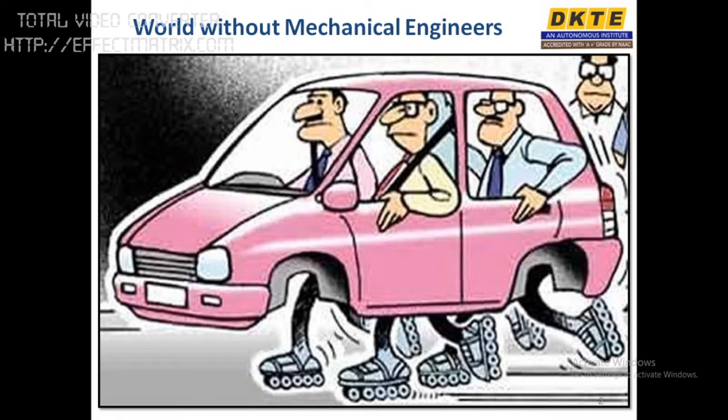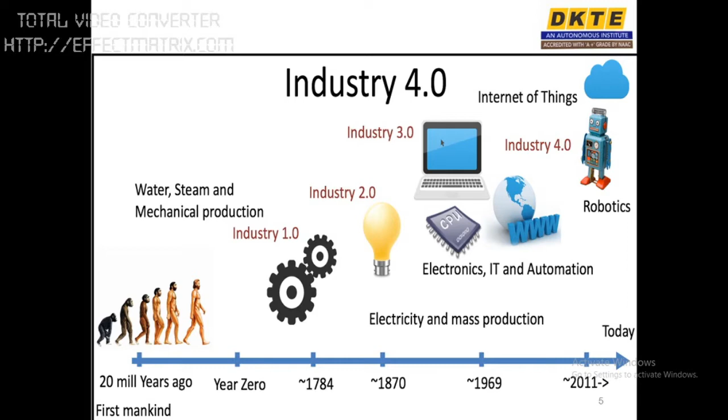Today, we just can't imagine our life without mechanical engineering, as you can see from these images. From basic needs of human beings to comfort products, mechanical engineering is everywhere. It has technologically developed from Industry 1.0 to Industry 4.0 with a more multidisciplinary approach including Internet of Things, robotics, artificial intelligence, and the same can be seen in the evolution of cars too.

The role of a mechanical engineer is to take the product from an idea to the marketplace. The steps in this process, and the areas where a mechanical engineer can find a job, include concept design, material selection as per requirements, design, analysis, production or manufacturing, assembly, and quality control.

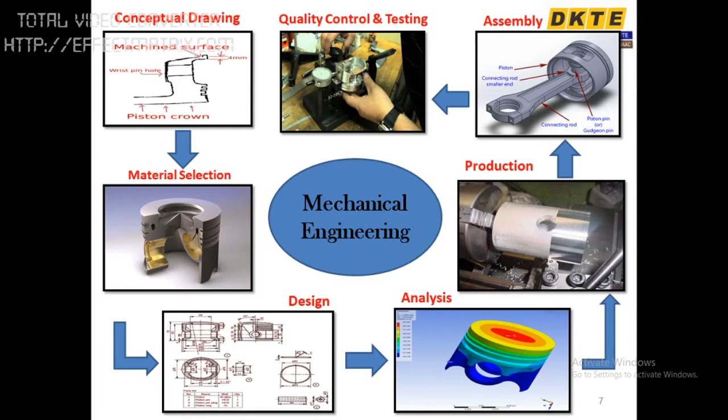Under the Make in India theme, companies and major players like Bosch, Mercedes-Benz, etc. are investing in India, and there are enormous mechanical startups too.

These are the domains of mechanical engineering where you can find yourself a place to make a career. Let us discuss them one by one in detail.

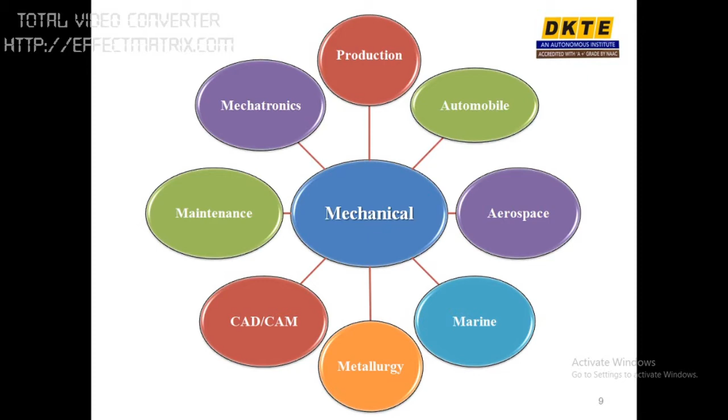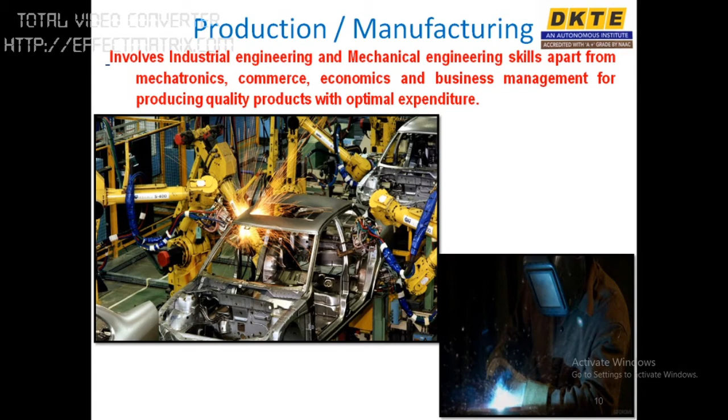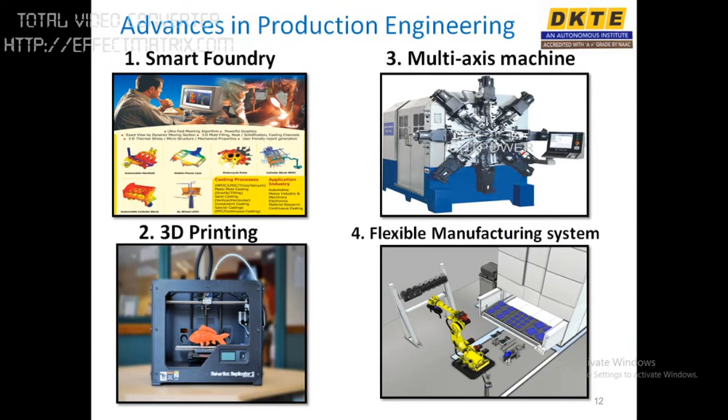Production includes industrial engineering and mechanical engineering skills apart from mechatronics, economics, and business management for producing best quality products at optimum cost. The advances in production engineering include robotics, smart foundry, multi-axis machines, 3D printing, and flexible manufacturing systems.

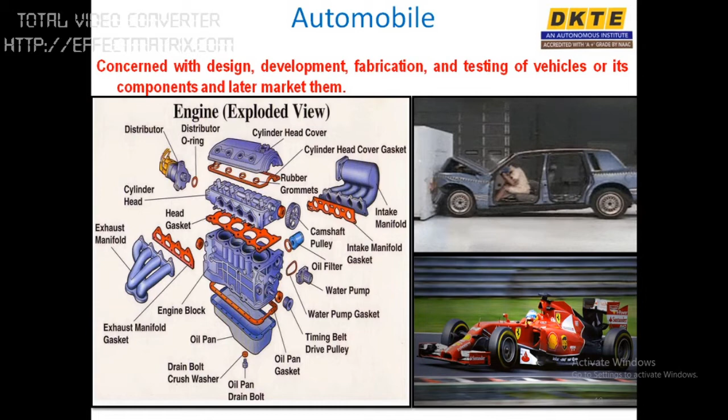Automobile engineering is concerned with design, development, fabrication, and testing of vehicles and later marketing them, and includes advances like hybrid cars, smart or driverless cars, and autotronics.

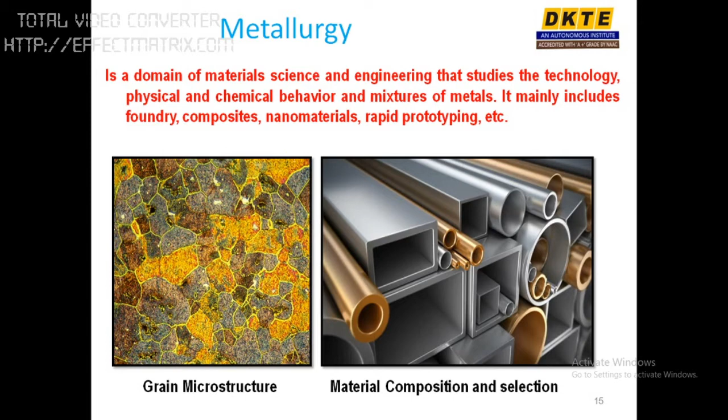Metallurgy is the domain of material science and engineering that deals with technology, physical and chemical behavior, and mixtures of metals. It includes foundry, composites, nanomaterials, rapid prototyping, and biomaterials.

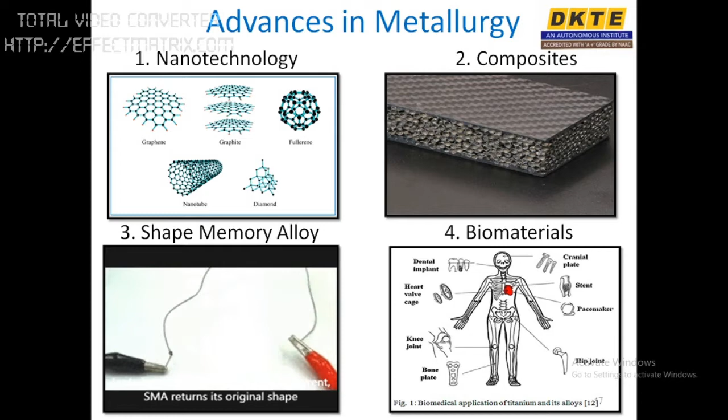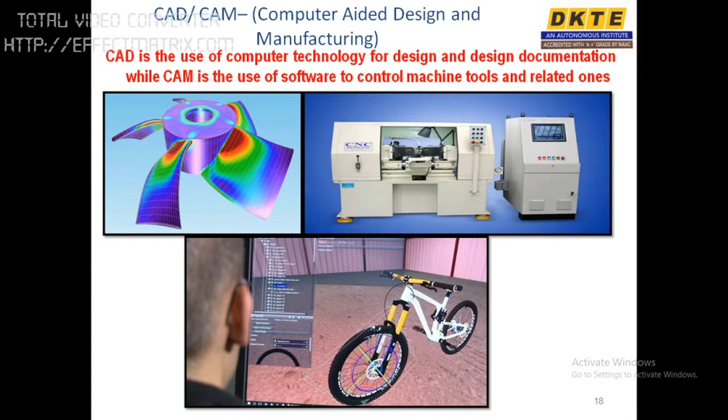CAD is the use of computer technology for design and design documentation, while CAM is the use of software to control machine tools and related processes. The latest advances in CAD/CAM engineering include laser scanning and reverse engineering.

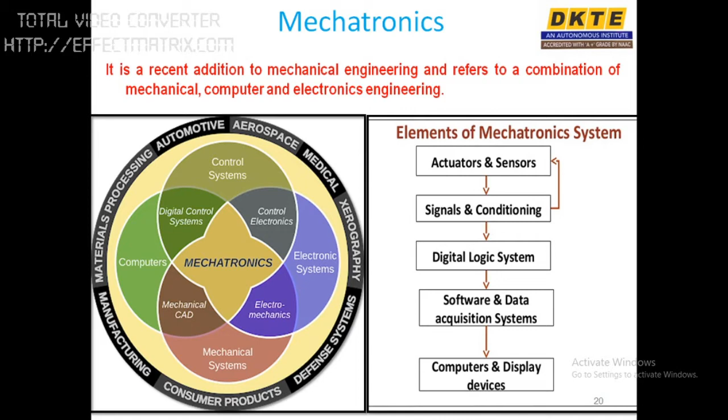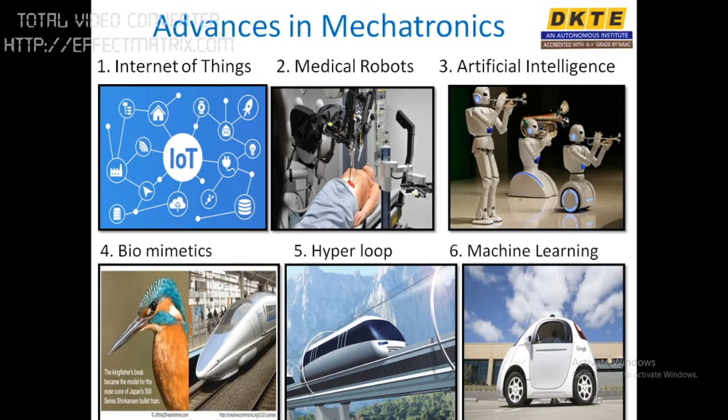Mechatronics is recently added to mechanical engineering and is an integration of mechanical, electronics, electrical, and computer engineering. It can be a great career option for girls opting for the mechanical branch. Advances in mechatronics include Internet of Things, medical robots, artificial intelligence, biomimetics, hyperloop, and machine learning.

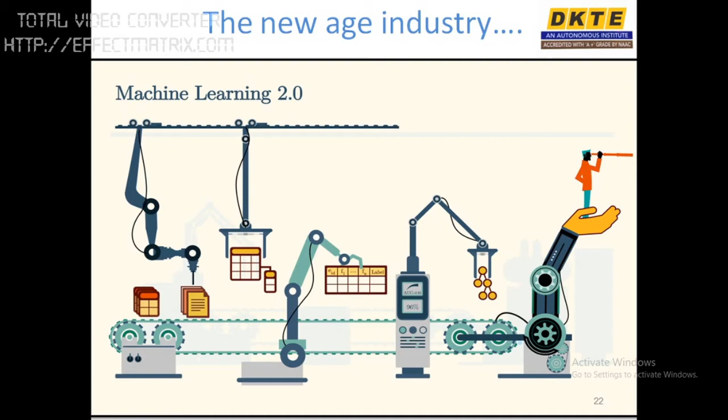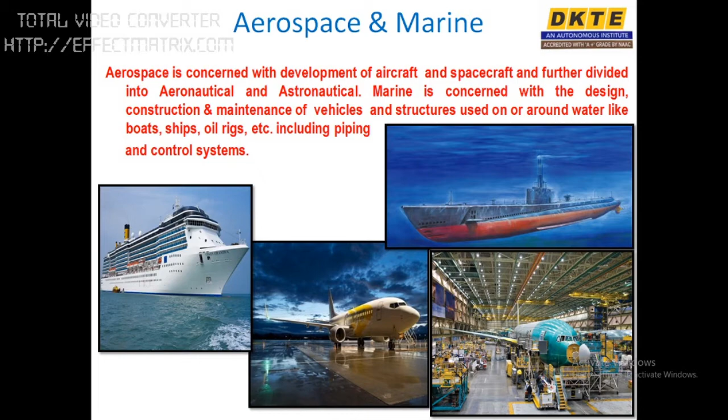Aerospace engineering is concerned with the development of aircraft and spacecraft, while marine engineering includes design, construction, and maintenance of vehicles and structures like boats, ships, oil rigs, etc., including piping and control systems.

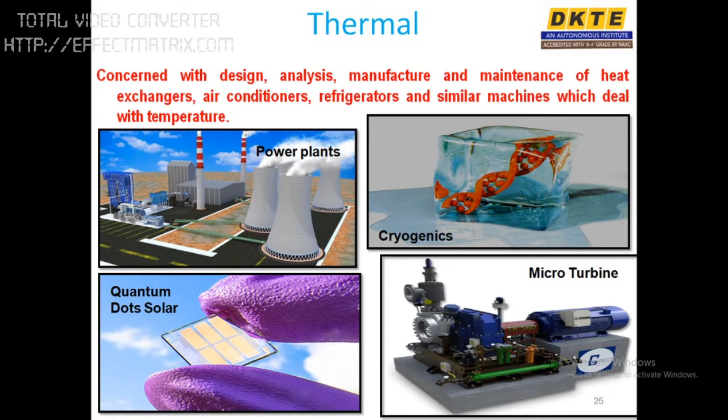Thermal engineering includes design, analysis, manufacture, and maintenance of heat exchangers, air conditioners, refrigerators, and similar machines which deal with temperature.

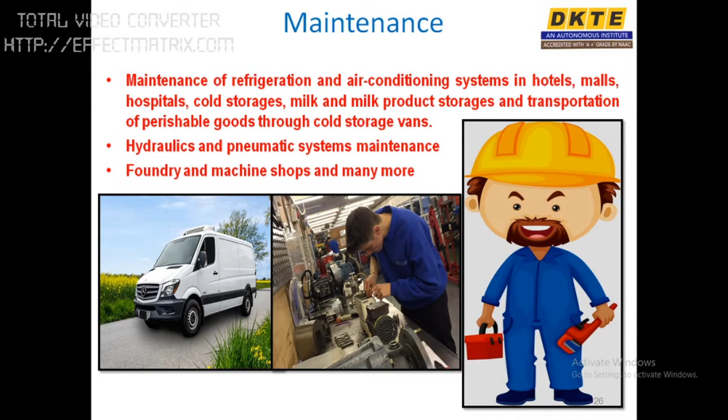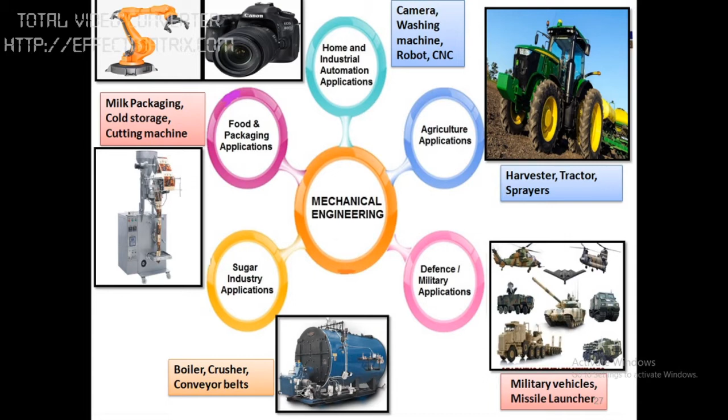Maintenance engineering finds application in refrigeration and air conditioning, hydraulics and pneumatics, foundry and machine shops, and maintenance of many more such systems. Now, these are the applications of various mechanical engineering domains that we have just discussed, including food and packaging applications, sugar industry applications, defense or military applications, agriculture applications, and home and industrial automation applications.

Now, a question might come to your mind: whatever I have learned in the last 4 years of engineering, where should I apply it? Or what are the job opportunities for me where I would get a suitable job or my dream job, and what would be the packages for these jobs?

Now, let's talk about it. You have two options for the job: private and public or government sector.

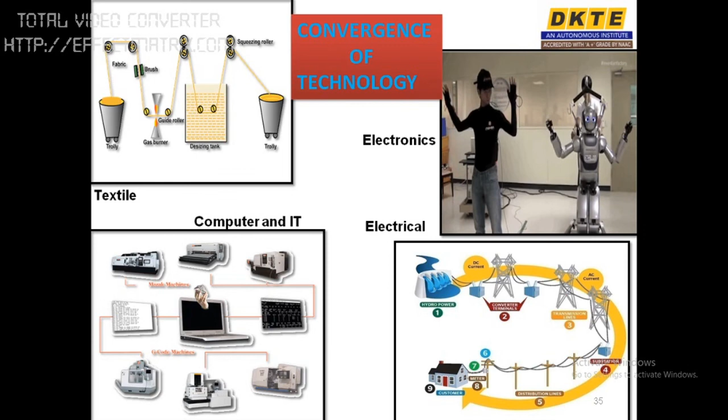To conclude, your future is in your hands, so choose your branch and career wisely. Think wise, think mechanical, which is today, tomorrow and forever. Thank you.